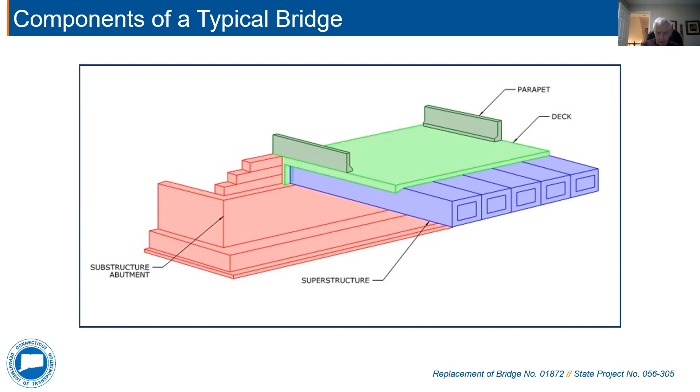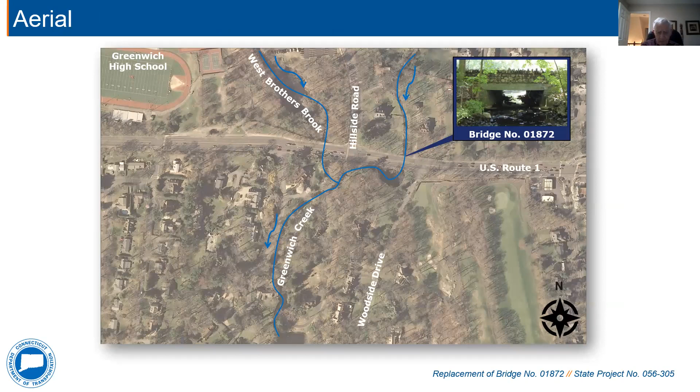Here is an aerial photo of the project location. US Route 1 is also known as East Putnam Avenue, and in this photo you can also see the location of Greenwich High School to the left of the bridge. West Brothers Brook and Greenwich Creek are highlighted in blue so they are more visible. Dave Chichia will have a similar slide up later and will be discussing some of the challenges we face with the hydraulics on this project.

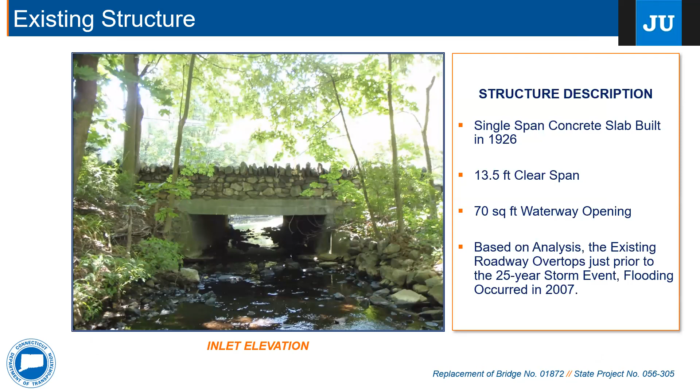This slide shows a photo of the structure taken from the inlet. The original structure is a single-span concrete slab built in 1926. The bridge has a 13.5-foot clear span and the waterway opening is 70 square feet. Based on our analysis, the existing roadway overtops just prior to the 25-year storm event, and flooding occurred here in 2007.

This slide shows a photo of the structure taken from the outlet. The curb-to-curb roadway width of US Route 1 is 49 feet in this location, and the out-to-out width is 69 feet. The out-to-out width includes a timber pedestrian bridge. There are 2 travel lanes in each direction, and the average daily traffic, or ADT, is approximately 20,200 vehicles.

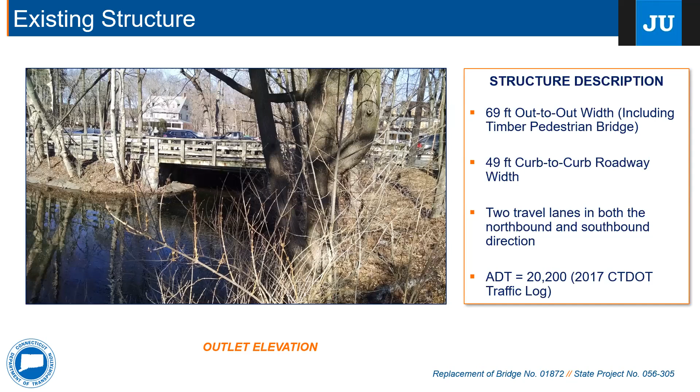This slide shows the project area at street level. In the photo on the left, we are looking east, and in the photo on the right, we are looking west along US Route 1.

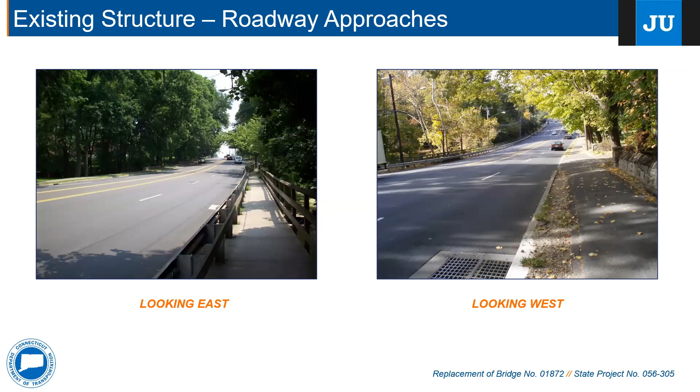The purpose of this project is to address safety concerns and structural deterioration. This will be accomplished by replacing a bridge that is in serious condition and too small to pass major storms. There are 2 photos on the right of the slide. In the upper photo, you can see exposed reinforcement, and in the lower photo, you can see deterioration of the concrete encased beam. It is in the public interest to improve the bridge for the safety of the residents and the traveling public. In addition to being a heavily traveled road, US Route 1 is also an emergency route for the town and access needs to be maintained.

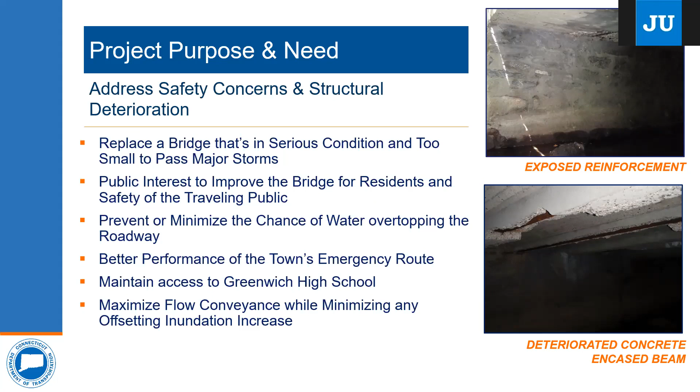In order to do that, we must prevent or minimize the chance of water overtopping the road by conveying as much water as possible and minimizing any increases in inundation. I will now turn over the presentation to Dave Chichia from BL Companies, who will explain some of the hydraulic challenges we face when trying to identify how to approach this project.

Good evening. As Sue said, my name is David Chichia. I am a principal engineer with BL Companies. I have been responsible for the hydraulic design of this project, as well as the development of the environmental permit applications. On the screen are 3 pictures of the flooding event that occurred in March 2007.

Due to the amount of flooding over the roadway, the town eventually shut down the road and traffic was forced to detour. Through coordination with the town, we have learned that this was a significant stoppage, with the roadway closed to traffic for an extended time.

Our proposed design has kept the storm in mind. Although the proposed bridge will not be able to convey the FEMA 100-year storm without overtopping, a storm matching the March 2007 storm will not overtop the proposed roadway. We cannot design the bridge to prevent the FEMA 100-year event from overtopping the road, since we do need to balance the increased hydraulic opening with the potential impacts to downstream properties.

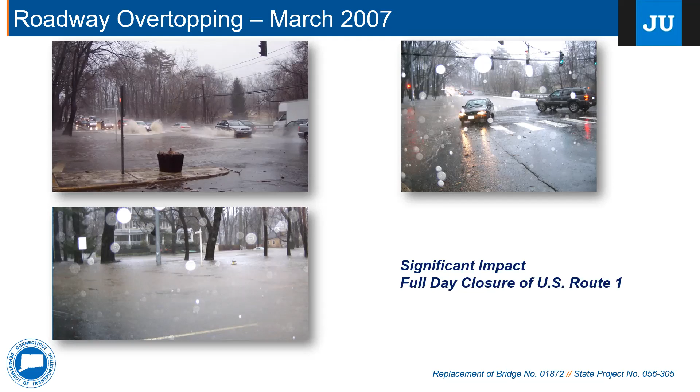This is the map Sue showed earlier, with pictures placed for additional detail. Greenwich Creek flows north to south below Route 1. Downstream of the bridge, the creek turns west and flows below a stone dike. Just past the dike, West Brothers Brook combines with Greenwich Creek and the flow continues south.

Approximately 150 feet downstream of the confluence, Greenwich Creek flows below the driveway of 12 West Brother Drive, and 350 feet further downstream, the creek flows below the driveway of 20 West Brother Drive. The creek then flows into a long, narrow water body and eventually into Long Island Sound.

Just upstream of the confluence of the watercourses, West Brothers Brook flows below a stone dike matching the style of the stone dike over Greenwich Creek. We do propose the removal of the stone dike over Greenwich Creek, but the stone dike over West Brothers Brook will remain.

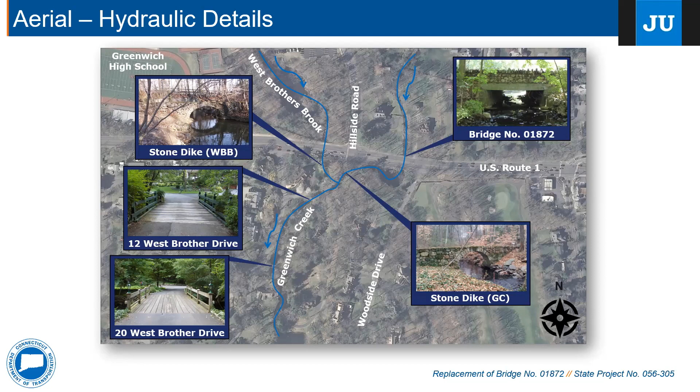The design of this project has a number of hydraulic constraints. There is a FEMA floodplain and floodway associated with Greenwich Creek. We do have slight increases in the floodplain elevation upstream of the road, with increases around 2 inches for the 100-year FEMA storm.

We can't further raise the roadway to prevent this because we would essentially be creating a dam, and by raising the road further, we would end up raising the water surface higher. We don't want to further increase the size of the bridge due to the increase in flow going downstream.

At the roadway, we are not in full compliance with the DOT drainage manual, but we do make a significant improvement to potential overtopping of the emergency route. Downstream of the roadway, the larger bridge opening and removal of the dike do increase flow to downstream properties. This includes flow at the driveway bridges, adjacent properties, and along West Brother Drive.

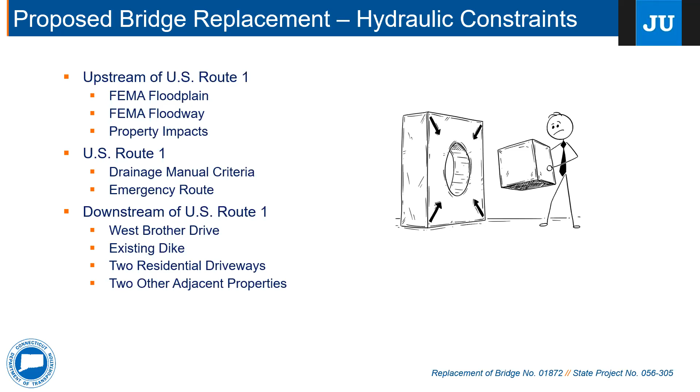So again, the hydraulic design is a balance. We provide a benefit to the traveling public by replacing a bridge that is structurally deficient. We minimize the flooding potential of the emergency route and maintain access to Greenwich High School during the lower storm events like the 25 and 50-year storms, which our model shows as overtopping the existing roadway.

We have maximized the flow of conveyance with minimal inundation increases, and the replacement of the existing roadway drainage system will increase the number of catch basins and improve roadway conditions during rain events.

There are a few encumbrances. We do increase inundation on downstream properties during extreme flow events. There will be traffic impacts during construction, which the designer will soon discuss, and the roadway will still overtop during a 100-year FEMA storm event.

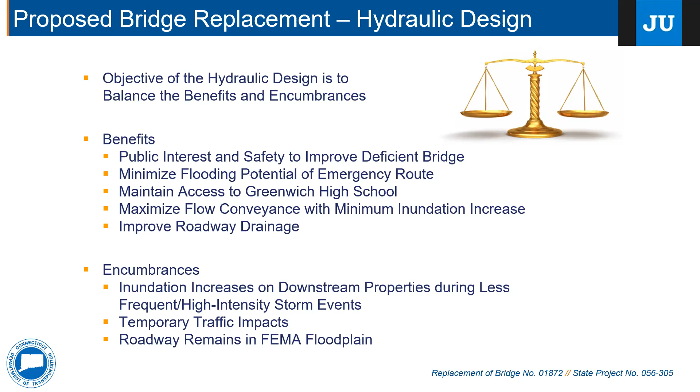As noted a few times, we are removing the stone arch dike over Greenwich Creek. Removal of the dike is required due to the impact it has on flow. The stonework left and right of the arch cause a blockage in flow that creates backwater extending upstream to the roadway. The dike's removal is required to prevent this backwater.

If the proposed bridge was constructed and the dike left in place, the roadway would continue to overtop during lesser storm events. We have received approval to remove the stone dike from the State Historic Preservation Office through what's called the 4F process. A requirement of the removal is to publish an article in the Society for Industrial Archaeology New England Chapter newsletter that discusses the project and the proposed removal of the stone arch.

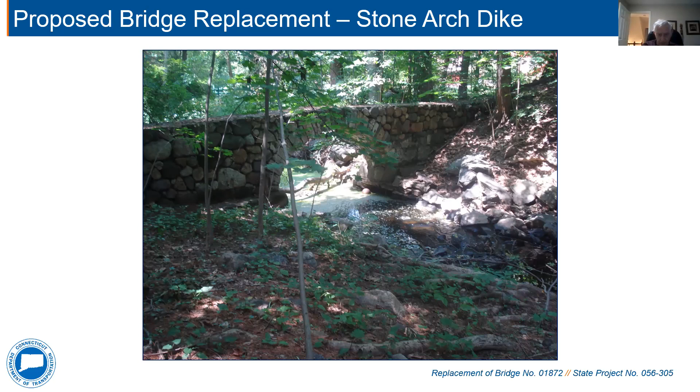US Route 1 will be reconstructed for about 850 feet. Hillside Road will be reconstructed for about 200 feet, which includes a profile increase of nearly 2 feet at the intersection of Route 1.

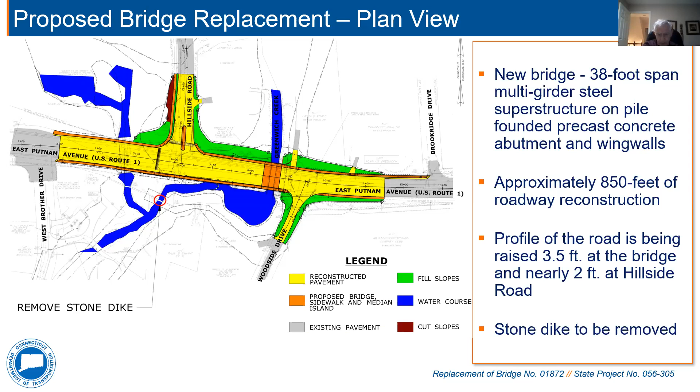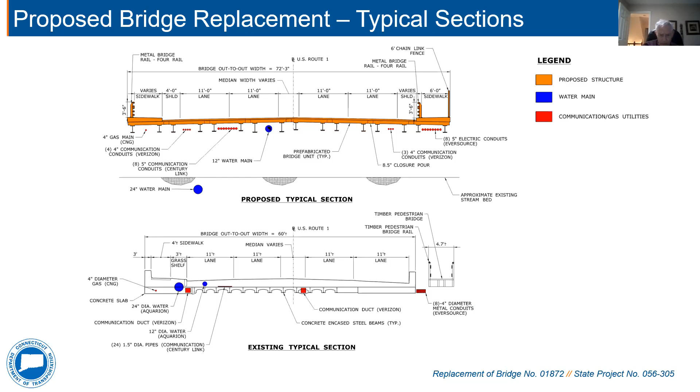These utilities will need to be maintained during construction and ultimately within the new bridge project. The next slide is the elevation view of the bridge.

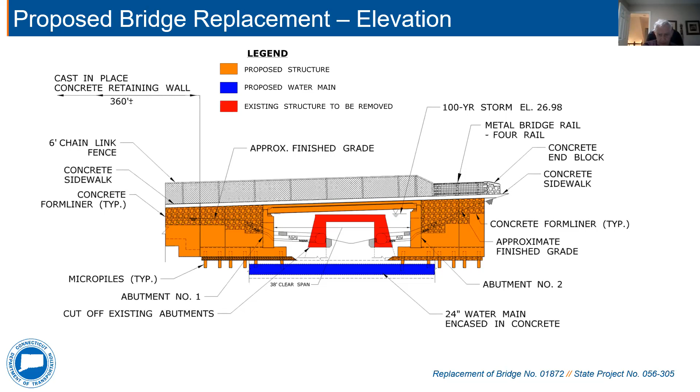A portion of the existing abutments will be left in place. The new 24-inch water main is shown in blue in its relocated position beneath Greenwich Creek.

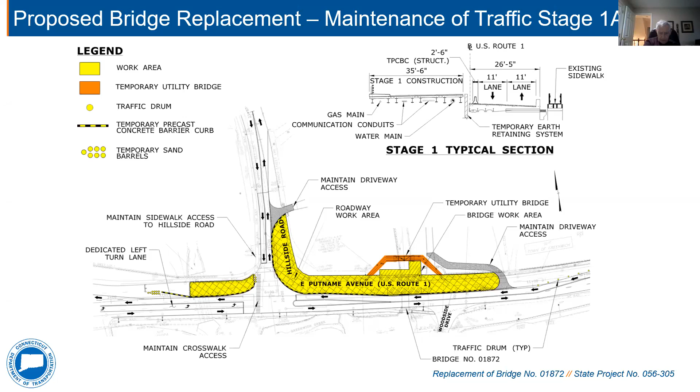This slide shows the final portion of Stage 1. During Stage 1B, Hillside Road will be closed. As you can see, concrete barrier will prevent vehicles from entering onto Hillside Road.

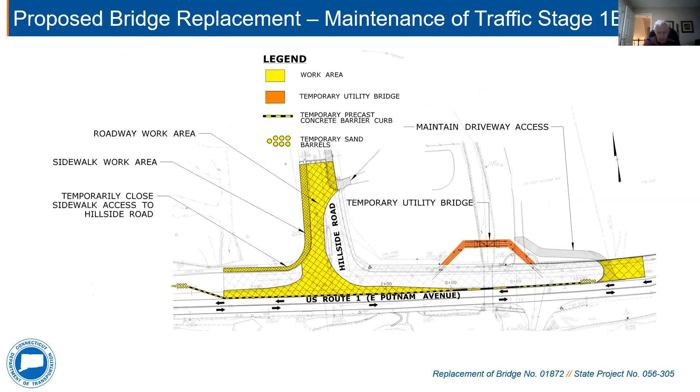The duration of the closure will be limited to 1 week in the summer if the timing is right, or 2 to 3 weekends if construction sequencing doesn't allow it to be done during the summer. This stage is required to raise the elevation of the road in this location to correspond to the higher new bridge elevation.

This slide shows the detour to be provided for the closure of Hillside Road. The detour will take vehicles to Dearfield Drive, then to Lake Avenue, then to North Maple, from North Maple to North Street, from North Street to Fairfield Road, and then back to Hillside. This detour is the safest drivable route which avoids sharp turns, weight-restricted bridges, and narrow streets.

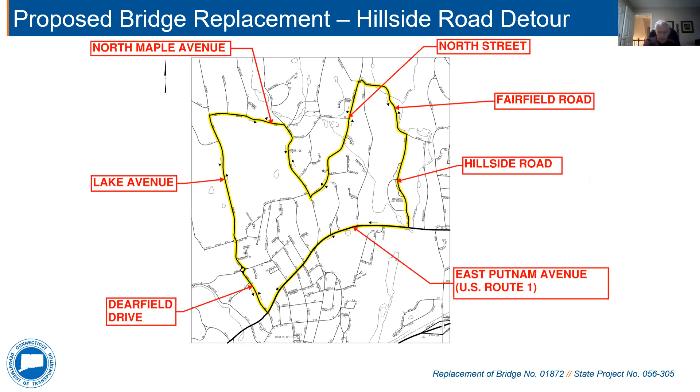Stage 2 is similar to Stage 1 in that, in order to construct the remaining portion of the bridge, one lane of traffic will be maintained in each direction. A dedicated left turn into Hillside Road from the west will continue to be provided. Traffic will be shifted to the north.

The work area is shown in yellow and will involve the construction of the southern half of the bridge and the roadway approaches. The closure of Woodside Drive will be required because of its proximity to the bridge construction. As you can see, the concrete barrier will prevent vehicles from entering into Woodside Drive.

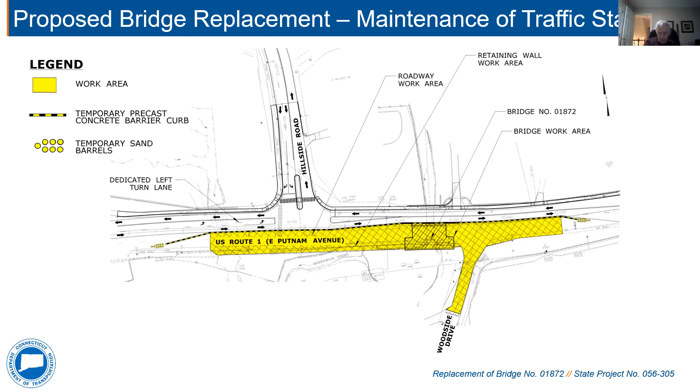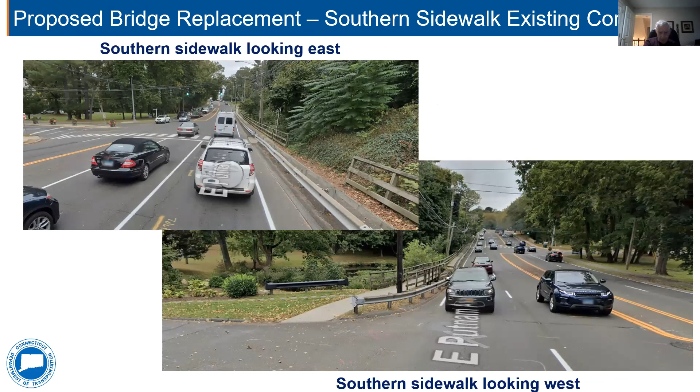This slide shows the existing condition. With this project, 42-inch metal bridge rail is proposed along the back of the curb line from West Brothers Drive to Woodside Drive. A gap in the railing is required for pedestrians to enter into the protected sidewalk area.

In this case, pedestrians coming from the high school will walk across Route 1 in the crosswalk through the gap in the railing. To protect vehicles from the fixed object created by the gap in the metal bridge rail, an impact attenuator will be attached to the railing.

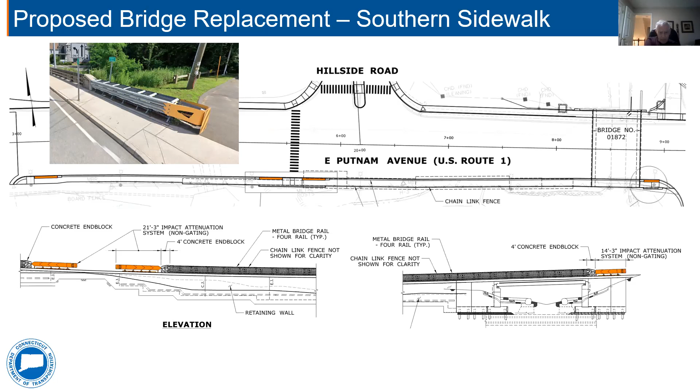The impact attenuator is shown in orange. A photo is included to show what it looks like.

At this point, we would like to bring to your attention some concerns that we have which may affect the duration of this project. The concerns involve utility relocation, in-water work, and time of year restrictions.

This project will require considerable utility relocation, both temporary and permanent. It is currently anticipated that the utility companies will self-perform the relocation work, both temporary and final. At this stage in design, the cost and duration of these activities is not yet finalized.

Some of the construction activities will need to take place in the water to construct the abutments in the dry. Cofferdams will be installed.

Cofferdams hold back the water. Ordinarily, there are restrictions on when cofferdams can be installed in the river. The time frames are connected to when fish passage and water flow are lowest, typically between June 1st through September 30th. This may extend construction durations.

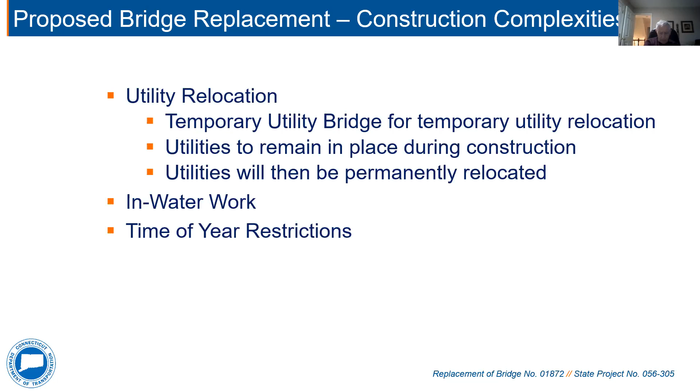Thanks, Julie. This is Tom Beckman again. As noted, this project has a significant amount of utilities that will be affected by construction. The following is a brief explanation of these utility impacts. The aerial utilities will remain in place for construction. However, the contractor will need to provide temporary support of the utility poles for specific construction activities.

Underground utilities will be relocated to facilitate construction. Some will be placed on a temporary utility bridge, some will be relocated to the utility poles, and some will be protected in place, dependent upon the utility. These utilities will be supported by the new bridge upon completion of the project.

There will be environmental permits due to the impacts to the inland wetlands and Greenwich Creek watercourse. The anticipated permits include U.S. Army Corps of Engineers pre-construction notification, Connecticut Department of Energy and Environmental Protection, or Connecticut DEEP, individual flood management certification with exemption, Connecticut DEEP individual inland, wetland, and watercourse, and Connecticut DEEP water quality certification.

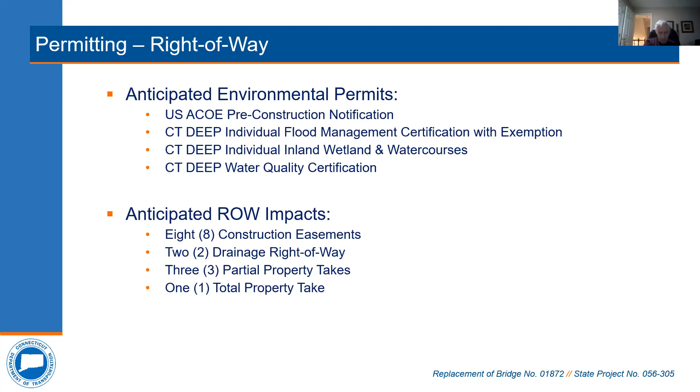There will be right-of-way impacts associated with the project. These include 8 construction easements, 2 drainage right-of-ways, 3 partial property takes, and 1 property take of a small piece of town property to consolidate the state's right-of-way. I will pass it off to Matt Giannakopoulos to explain the right-of-way acquisition process.

My name is Matt Giannakopoulos, and I am a project coordinator with the department's Division of Rights-of-Way. It is our office's responsibility to acquire the property rights needed for transportation projects. The proposed project design requires the acquisition of property rights, so I'd like to give a brief overview of the department's right-of-way acquisition process. Please keep in mind, though, that the specific impacts are still being fine-tuned and may change as the design progresses.

Any property rights that will be required will be acquired in accordance with Connecticut General Statutes Sections 13A-73 and 13A-98E. And whenever there is federal money used in any aspect of a project, the department must adhere to the Uniform Relocation Assistance and Real Property Acquisition Policies Act of 1970, as amended.

Once the design has moved to the point where we are ready to begin the acquisition process, each affected property owner will receive a formal letter of intent to acquire from our office, along with a property map which depicts the exact property rights to be acquired.

At that point, our office will determine the fair market value of those property rights and use that value to establish an offer of just compensation.

That offer will be sent out to the property owner in writing, and a right-of-way agent will be available to meet with the property owner and explain the project, go over the specific impacts to their property, and explain the state's offer. The property owner will have a reasonable time, typically at least 30 days, to consider the state's offer.

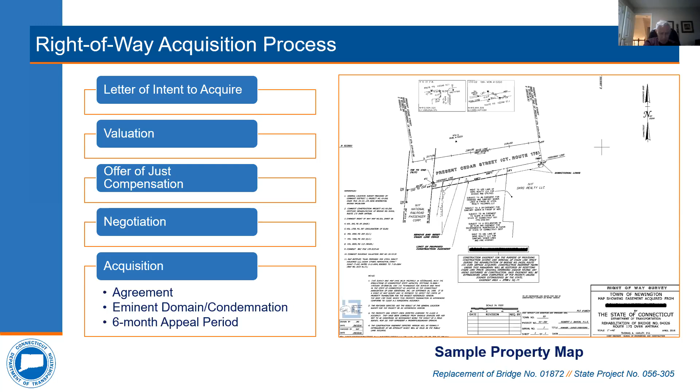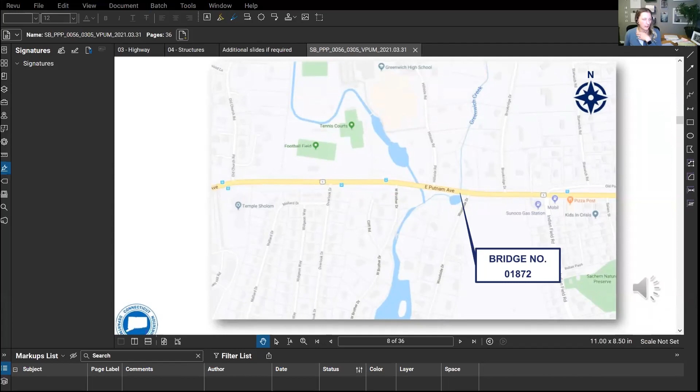Okay, let's go back to some of these questions. A gentleman named Fred is asking if pedestrian access sidewalks will be affected. Does someone want to take that question?

This is Julie. There will be some changes in pedestrian access during construction, but a pedestrian plan is provided. Pedestrians will always be accommodated, but maybe not on every side all the time.

This is Art DeCesar again. I just want to add, pedestrian traffic would coincide with the stage construction and be maintained at all times. If the southern portion of the bridge is being rebuilt, pedestrians would be on the north side of US Route 1, and if the north side is being built, pedestrians would be on the south side. So one of the two sidewalks will always be maintained.

Thank you both, I appreciate that. Elizabeth Dempsey was asking will the two-lane traffic be restored during non-construction season, November to April? That restoration would provide a lot of relief until the bridge is finished. I believe the question is about winter shutdown and whether the two lanes would be restored.